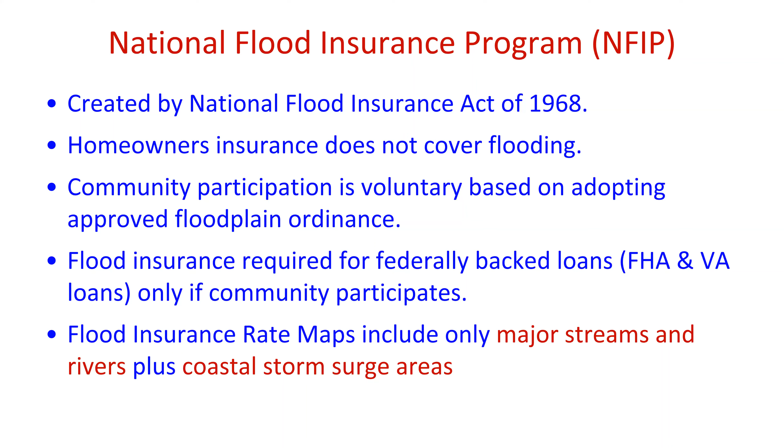Although the NFIP has disaster recovery policies, it depends upon local enforcement, which is one of the challenges it has. Insurance is voluntary unless federal funds or loans are involved. And what it really does, because it's a federal program, is make flooding an affordable risk. Before Harvey, it was over $17 billion in the red, primarily due to Katrina and Sandy, but it was never self-sustaining. I don't have figures on how bad it is now since Harvey came, but I imagine it's probably closer to about 30 billion in the red. But the point is, it's never been self-sustaining.

Other challenges is that it uses flood insurance rate maps, and because they're insurance rate maps, they're really not regulatory or planning maps. So they represent what the risk is today, even though future development may increase the flooding a foot or two. Only a community can adopt certain regulations for that, but the flood insurance rate map only shows what the flooding is now based on the best available studies. It identifies only what's called the 1% or 0.2% risk, known as the 100-year or 500-year floodplains, no matter how deep in the floodplain you are.

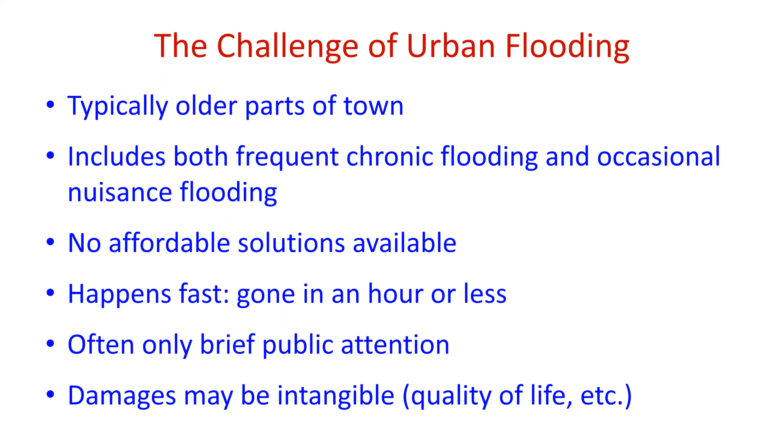Generally, this kind of flooding is not addressed by the National Flood Insurance Program. We've said that the flood risk is not mapped. It's all considered Zone X, no flooding. And it's considered really just a local problem. There's no established recovery process after flooding, like the NFIP has for when major flooding occurs along streams and rivers.

And it's a low grant priority. I've even had a floodplain manager call it not floodplain, so somehow it's not important, or it's not really flooding. I don't really understand that, but because it wasn't mapped by the federal government, apparently it's not very important.

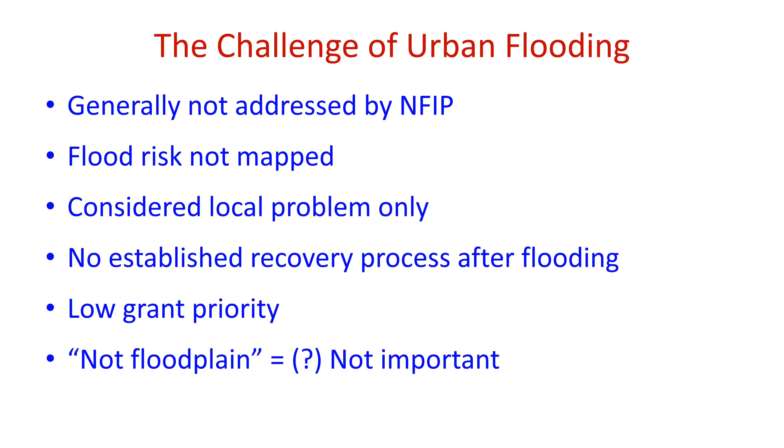So before we go further into looking at urban flooding, I want to go through 4 general considerations. The first is water law.

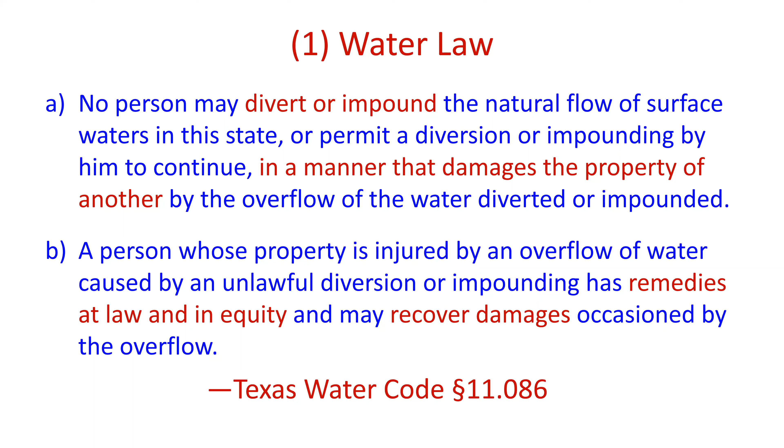In Texas, the water law is really handled by Texas Water Code 11.086, where no person may divert or impound the natural flow of waters in the state in a manner that damages the property of another. And a person whose property is injured by the overflow of water has remedies at law and in equity and may recover damages. So what does that mean?

It means lawsuits. And I have been involved tangentially in 2 or 3 different lawsuits over the years. The city was only directly sued twice, and it was really something that was more of a private issue.

But the folks doing the mediation really like to get the cities involved, since the cities have the money. But there's a lot of policy issues involved with some of these lawsuits.

A second consideration is what I'm calling the no adverse impact policy. This is from the Association of State Floodplain Managers as it relates to floodplain management. It says no adverse impact floodplain management takes place when the actions of one property owner are not allowed to adversely affect the rights of other property owners. It describes that in terms of increased flood peaks, increased flood stages, higher flood velocities, increased erosion and sedimentation, and other impacts the community considers important.

Many communities have adopted no adverse impact policies for new development, and ultimately, that policy should guide solutions to urban flooding. We can't solve urban flooding by putting in partial improvements and just moving flooding from an area upstream and pushing it downstream someplace. That's just not going to work.

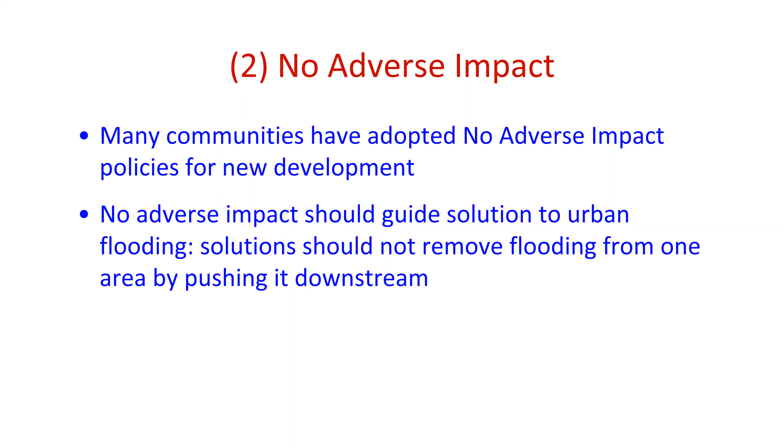Our third general consideration is hydrodynamic modeling. Urban flooding is really too complex for traditional modeling and calculations. Hydrodynamic modeling has become an essential tool for understanding urban flooding. It's able really to track overland flow as well as pipe capacity. But this fully dynamic flow modeling requires complex software.

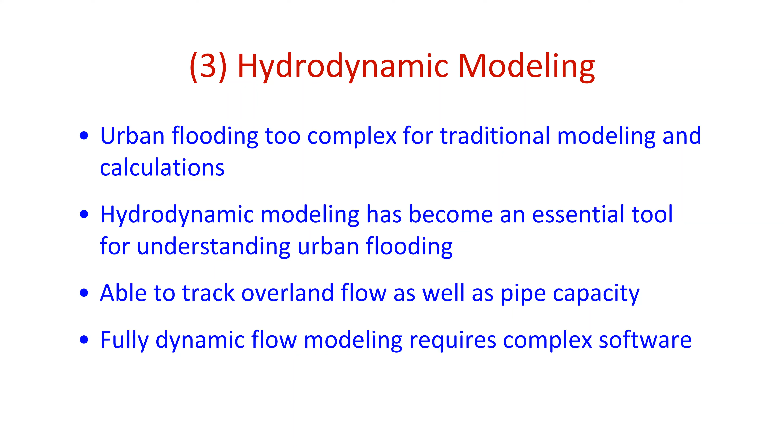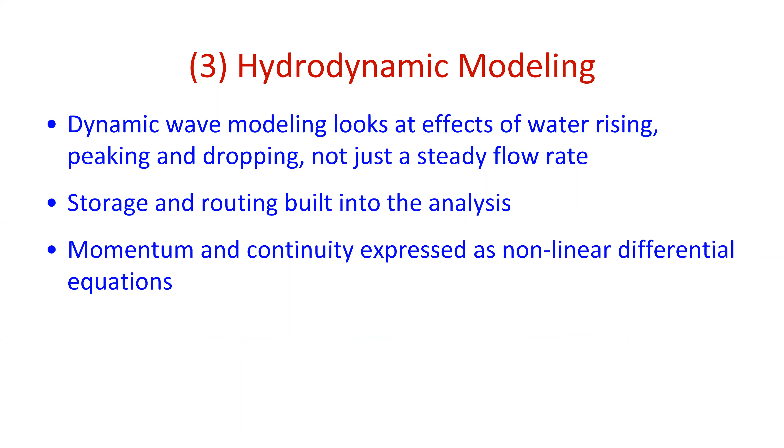The dynamic wave modeling looks at both the effects of water rising, peaking, and dropping, not just a steady flow rate, like many of us have with what I started out with, HEC-2, it's HEC-RAS now. Storage and routing are built into the analysis of this dynamic wave modeling, and the momentum and continuity are expressed as nonlinear differential equations.

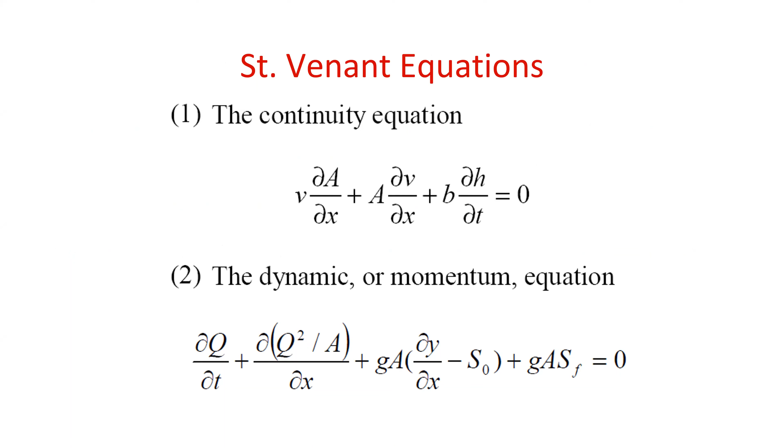I don't know about you, but I have never solved any one of these by hand. But fortunately for us, before these computer programs existed, we really couldn't do much. But we do have a lot of software available now. Two of the major products are now under the Innovyze umbrella.

InfoWorks was developed by Wallingford, and XP SWMM was developed by XP Software. They're now under the same umbrella. Mike Flood is produced by DHI.

The Corps has come out with HEC-RAS 2D, and it's more and more robust since the time I originally presented this. I've never used HEC-RAS 2D, but I've seen presentations where folks use it for some fairly detailed investigations. There's also other products out there that can be available.

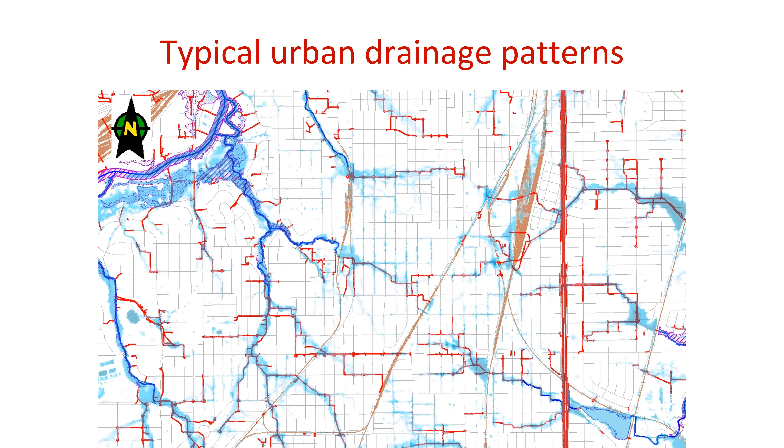But then you put on the storm sewer system and you realize that there's a whole lot of drainage that's really not accounted for. And you do some hydrodynamic modeling, and this is the kind of flooding that you can get in a neighborhood. You see it can be quite extensive and quite a bit broader than anything that's mapped as a FEMA floodplain.

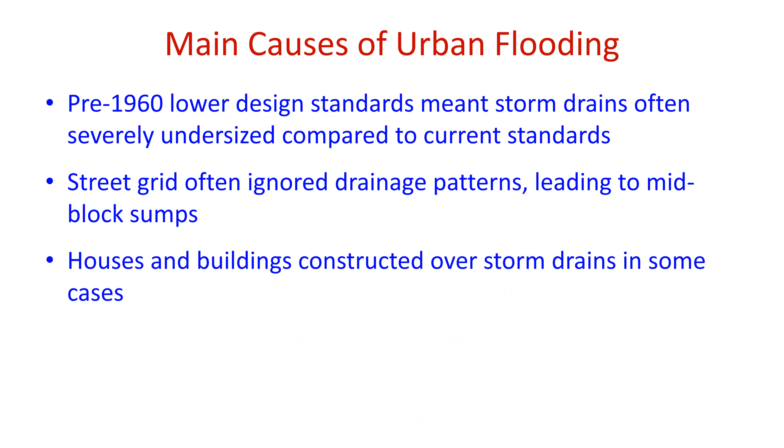So what are the main causes of urban flooding? Pre-1960 had lower design standards, meaning storm drains often were severely undersized compared to current standards. In fact, in some cities it's about 1990 when they adopted the 100-year design, if they have one that's that high. The street grid often ignored drainage patterns, leading to mid-block sumps, and houses and buildings were constructed over the storm drains in some cases.

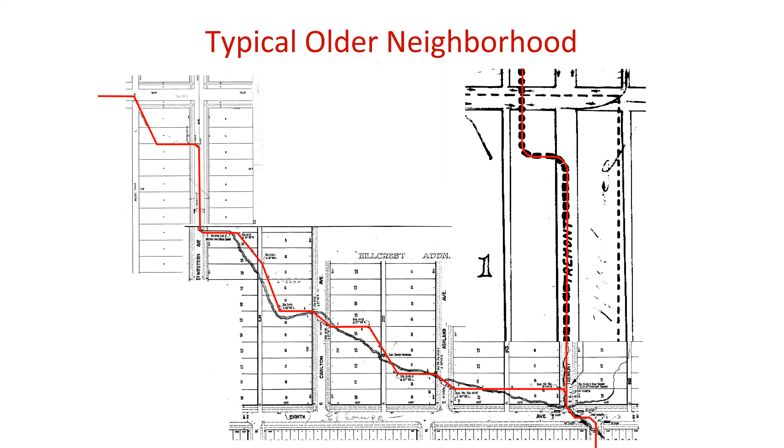For example, this is one older neighborhood in Fort Worth, called Arlington Heights, and we're going to come back to that. I pieced together the storm drain maps. You can see a stream going across, but I've highlighted the path of the storm drain. The plans weren't very easy to read, so there's the path of the storm drain. Now we lay over the neighborhood today, and you see it just kind of goes cattywampus right across the middle of the neighborhood.

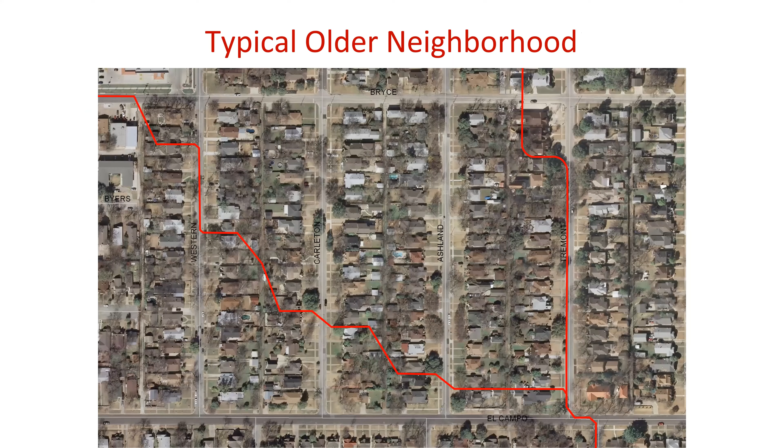And we start looking at the flooding, and you see all the extensive amounts that can be flooded. Now, it doesn't look like the flooding is too deep between the houses, but...

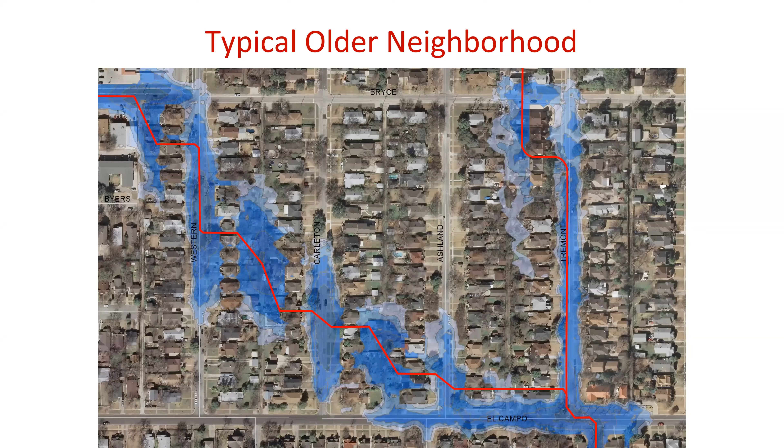Actually, on the next slide, we'll take a little video of this. Let me warn you now, I've got the audio on, and you might want to turn down your volume for just a moment before it gets too loud in this next video. That's right there in the street, and the water's every bit of 10 foot deep.

But as you see, all the water drains were popping up over there. Look, so, I mean this is not even slowing down, dude. It's still just powering out of there. Let's see, all that stuff on Camp Bowie will drain over here. Yeah.

Okay, I'm back. So, how do we solve this kind of flooding problem?

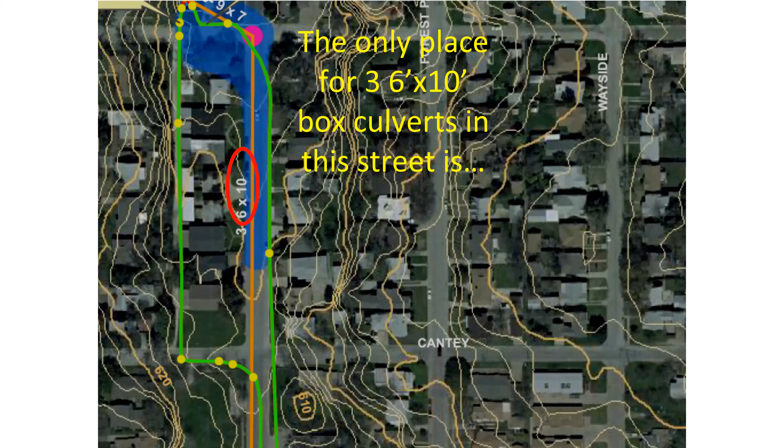Another area of town, we did a solution. It showed one little orange line that says 3 6x10 box culverts, but when you actually look at where the box culverts would have to be, the only room for them is actually where the houses are. And in that case, you may as well turn it back into a creek. We'll look at an example of that coming up.

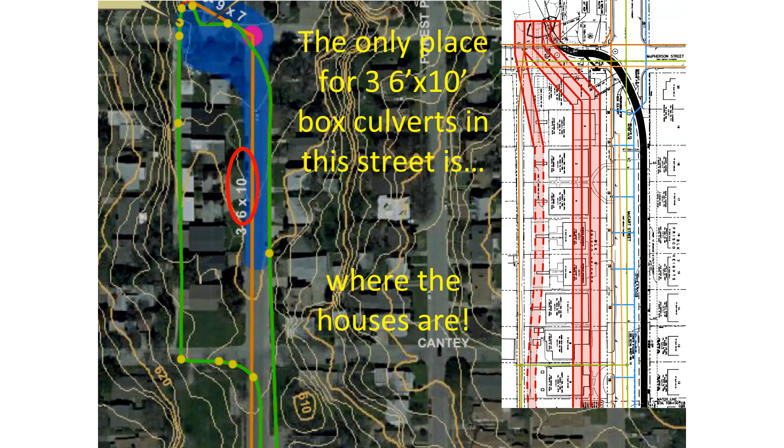What about following the street grid to reduce home buyouts? This is back in the Arlington Heights neighborhood. We laid out a little alignment to follow the street grid, and you see at the intersection there, the pipe would be 32 feet deep.

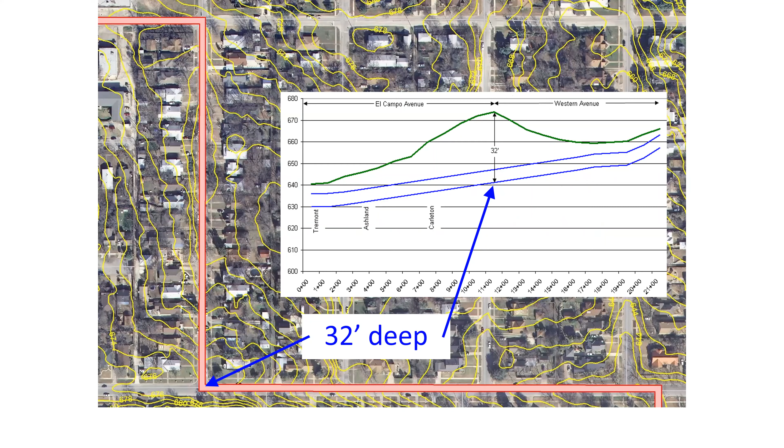Well, what about tunneling? Tunneling's a really, really neat idea. It preserves the neighborhood, you can go in deep underground. But in this particular case, this was $30 million, and that was about 10 years ago. Probably if you did a realistic, detailed pricing today, with really good information, you could still probably do this for maybe about $50 million. But again, very, very expensive to do.

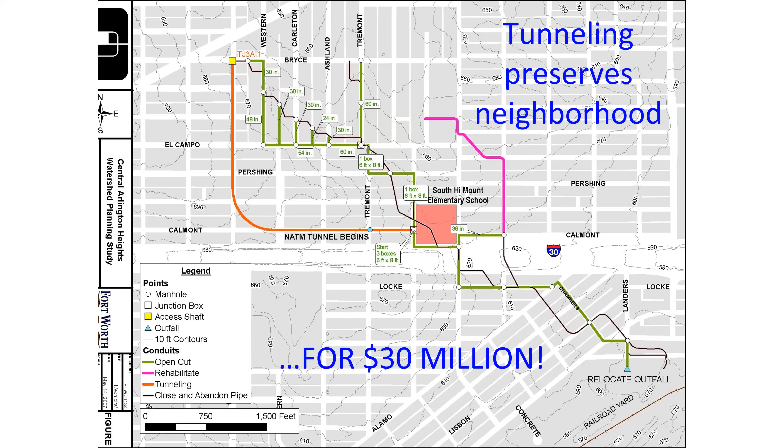We looked at one in the neighborhood of South Fort Worth, over by TCU, where we have extensive flooding.

This particular tunnel would be closer to $100 million in cost, but it would at least allow discharge directly to the river. We'll talk about why we would go directly to the river in a little bit.

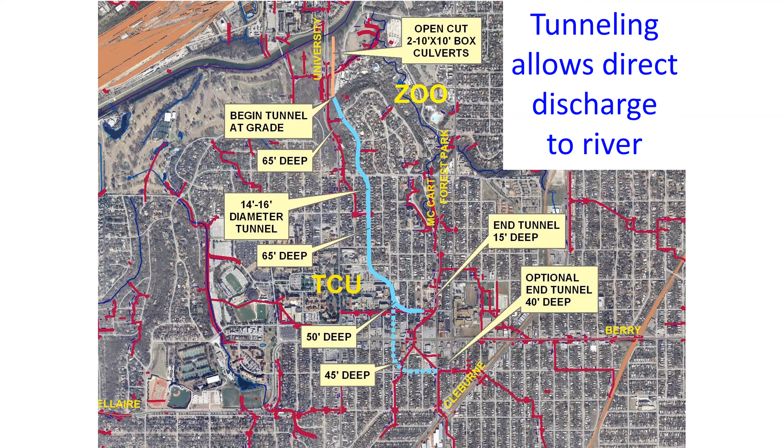In fact, that would be a real good time to do that now, and that's called the hydrologic considerations with conveyance. I'm going to talk a little bit about our college days - some of us remember the unit hydrograph method.

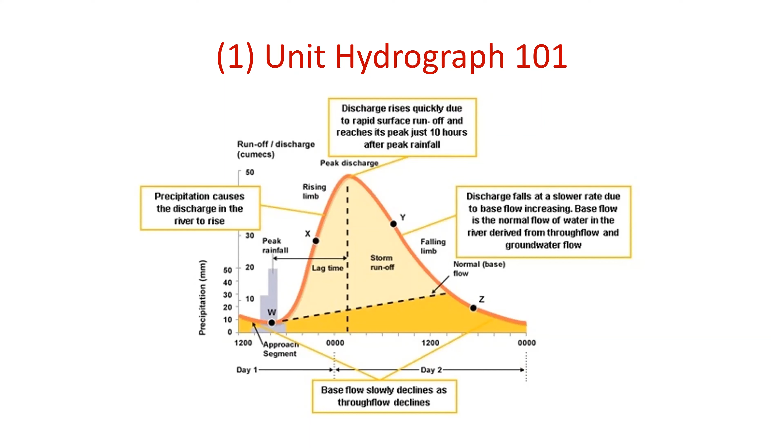The unit hydrograph shows how the flow rises after a storm. The gray represents the rainfall. The lag time is the time from the rainfall occurring to the flow causing the peak discharge, and then the water level goes back down.

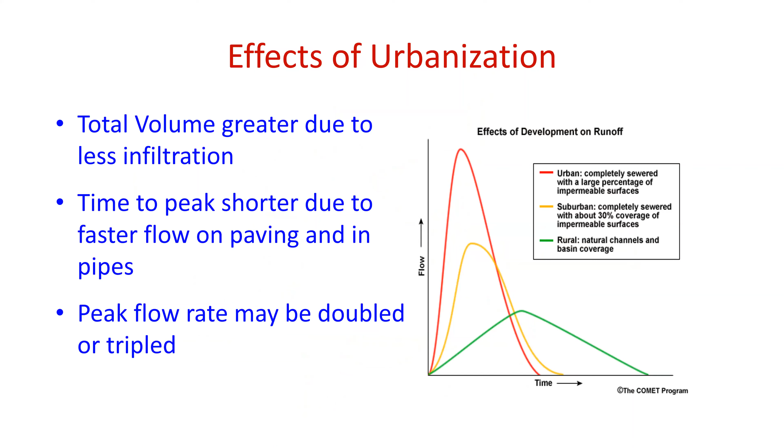Now, with urbanization, the total volume is greater due to less infiltration. The time to peak is shorter due to faster flow on paving and in pipes. And the peak flow rate may be doubled or tripled from what it was before development.

I'm going to give this example. This was prepared by HDR for one of our studies. They were actually looking at a floodplain along a creek, but they had three fairly large drainage systems all coming out, and the creek starts here in this 6B area. They looked at how you would estimate flow coming out of these storm drain areas.

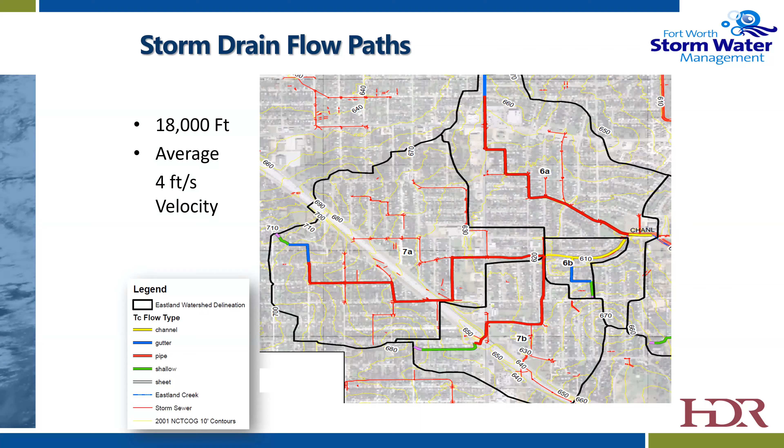The first thing they looked at was the storm drain flow path. These three areas together had about 18,000 feet of storm drain path, averaging about 6,000 feet. They said the average flow velocity would be 4 feet per second over the total distance, including the collection time and overland flow time.

If we had no storm drain, the flow path would total about 17,000 feet, and it averages only about 1.5 feet per second - significantly slower flow if there was no storm drain system.

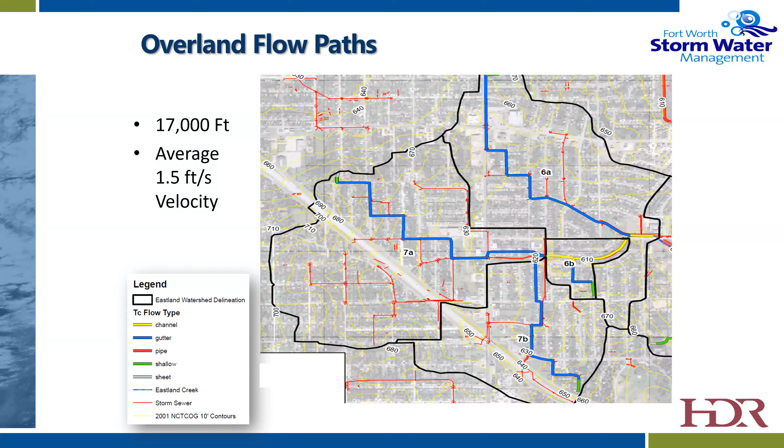So we're going to look particularly at the one in the middle here, the larger one, 342 acres. If it was only overland flow, the time of concentration is 68 minutes, and the peak flow would be 1,100 cubic feet per second. If all the water could fit in the storm drain, it would be a 28-minute time of concentration, and the peak flow would be 1,800 cubic feet per second - a fairly significant difference between the two.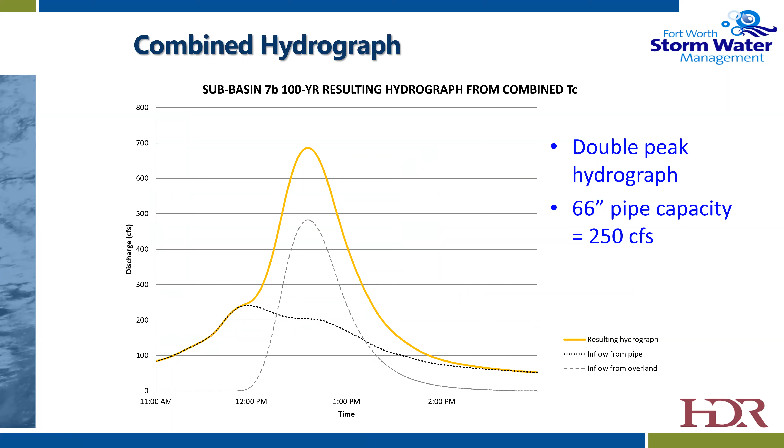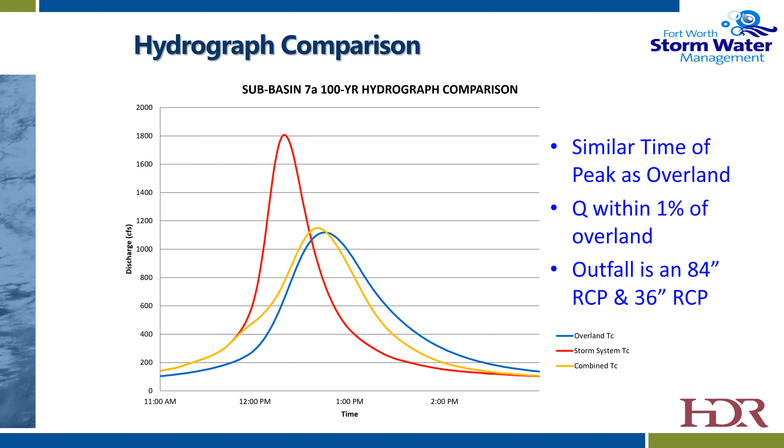So let's look at our three hydrographs together, and you find out that really the actual situation is not too different from a hydrograph than if it's all overland flow. The yellow and blue are fairly similar, and they're both significantly lower than if all the water were to go in the pipe. So the conclusion is that if we're actually going to put a pipe in that neighborhood, we could expect the peak flow to increase by over 60%, from 1,100 CFS to 1,800 CFS if we were to do that.

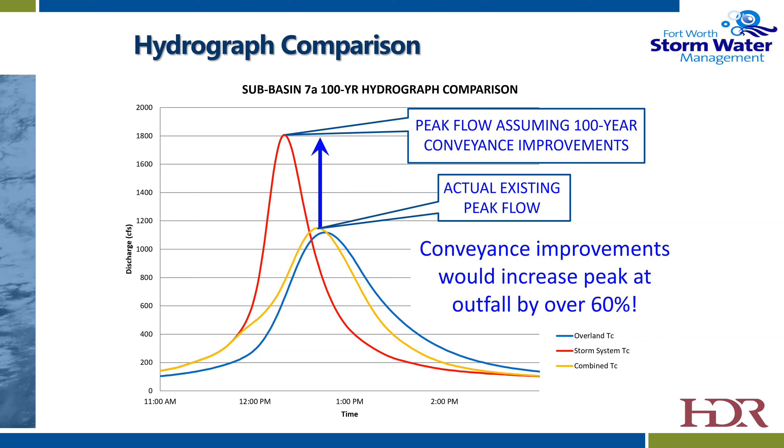Now, we're going to come back to look at the effects of this in a moment, but I wanted to talk about another hydrologic consideration, and that's valley storage. This is a measure of a stream's ability to store water as it moves downstream.

A good example of this is the Trinity River floodplain, across East Fort Worth and North Arlington. You see the floodplain gets really, really broad, but there is a lot of water that gets stored here. The more that we put in levees and reduce the amount of spread of the water, the less valley storage there is, and so the more water moves downstream.

Dallas has areas significantly subject to flooding, but if this valley storage were being removed, all of the Dallas levees would be more frequently overtopped.

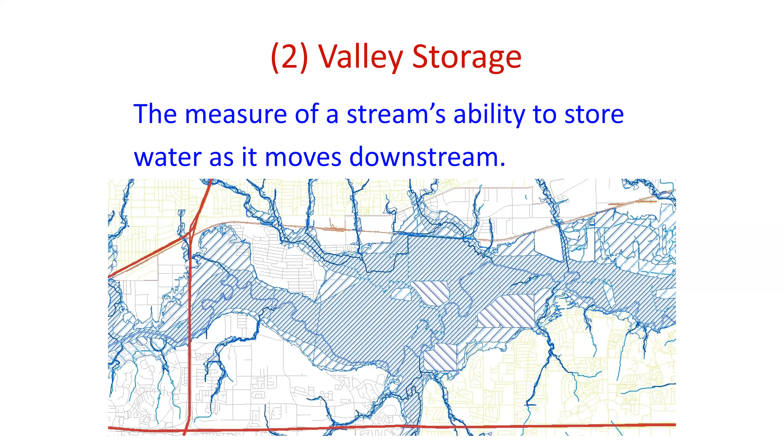So let's go back to the neighborhood we were looking at. We do have valley storage in neighborhoods when the storm drain is undersized. Somebody called that one time 'living room detention.' It's kind of tongue-in-cheek, but unfortunately you do have detention in the neighborhood or valley storage - unfortunately, it's in the living room of people. And so it's a catch-22.

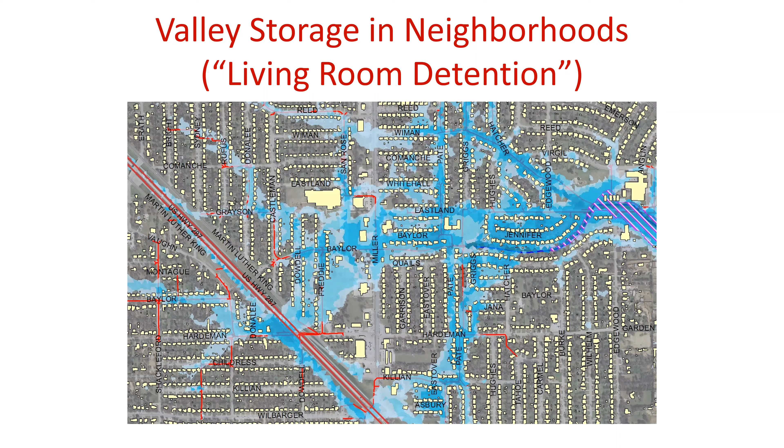So looking now at our situation, this is downstream of 2 of the areas we were looking at, and we're only looking at the north side of the channel. The channel itself is in dark blue. But the floodplain as it is now, with half the flow in the 5-year flow in the pipe and everything else coming over land, we didn't do a detailed hydrodynamic model, but this is a fairly decent approximation. The 100-year flow is shown in yellow.

So there's a few houses affected, but for the most part the water's contained in the street. If we were to put in a 100-year conveyance, just in this section alone, the number of houses affected would be tripled. We could probably expect that, or maybe more, on the south side of the channel.

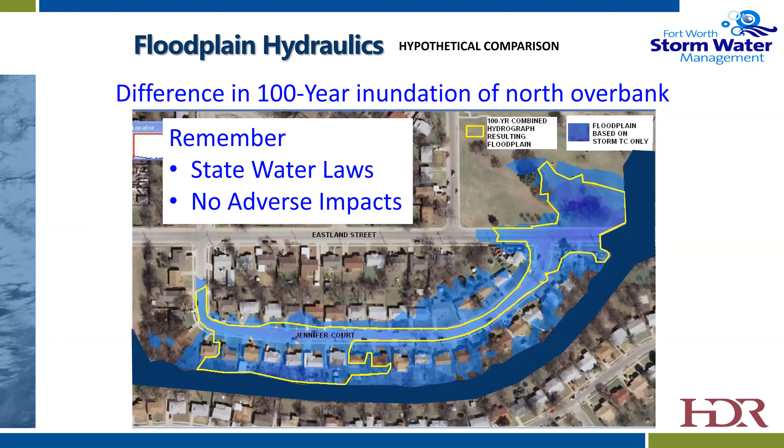So what does this tell us? It tells us we've got to remember the state water laws and the no adverse impacts policy, and it makes it very difficult to put in upstream conveyance where we'd cause increased downstream flooding. So in conclusion, our upland flooding is caused by undersized storm drains. Upland flooding caused by undersized storm drains will reduce the flooding downstream. So living room detention, which is bad for people upstream, is actually valley storage, which is good for people downstream. And so the larger pipes we put in, we're likely just to move the flooding downstream.

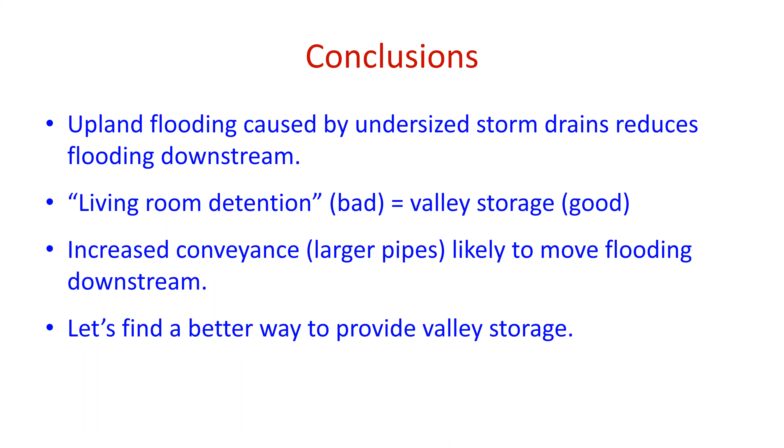But we need to find a better way to provide valley storage rather than in people's living rooms. And of course, that brings about the magic word called detention. So going back to the unit hydrograph, the whole point of detention is to try and control the peak flow, limit it to what it was before urbanization.

There'll still be a greater volume. There'll still be a greater length of time at that peak. Some folks have talked about increased erosion issues and things like that. Those are things you have to deal with on an individual basis. But ultimately, it tries to bring down that peak to what it was before urbanization.

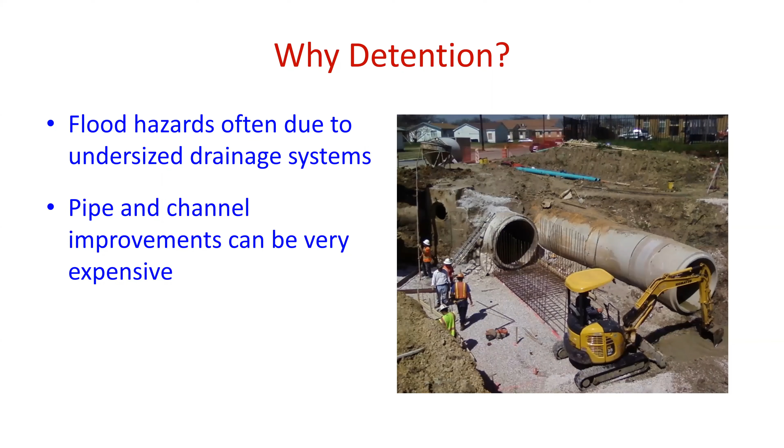Now, why would we do detention? Well, flood hazards are often due to undersized drainage systems, and pipe and channel improvements can be very, very expensive. The conveyance improvements can push the flooding downstream. We've just looked at that. Here's some examples of the kinds of impacts you might have. And there's the legal implications we've just talked about for causing downstream impacts.

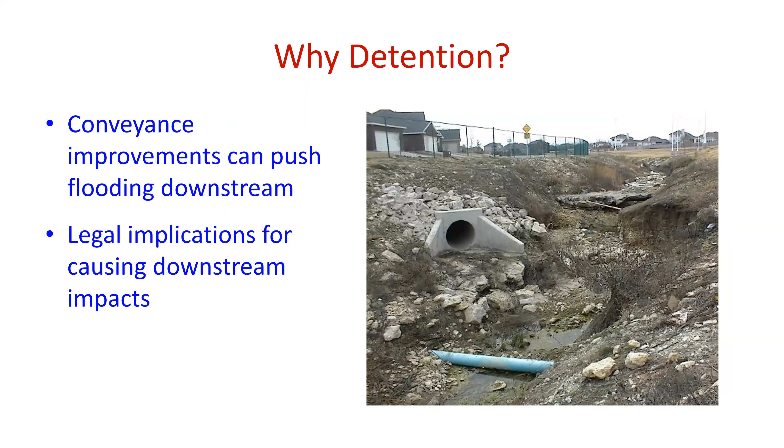So why would we do detention? Well, detention decreases flooding impacts continuously. Everywhere you put in detention, everywhere downstream from that point all the way downstream, the flooding impacts are decreased. And detention is much cheaper to build, except for land cost. Now, every once in a while there's a way to get around land cost, but that generally means your detention is doing something it wasn't really intended to do.

To my friends at Texas Tech, thank you for the good example for detention.

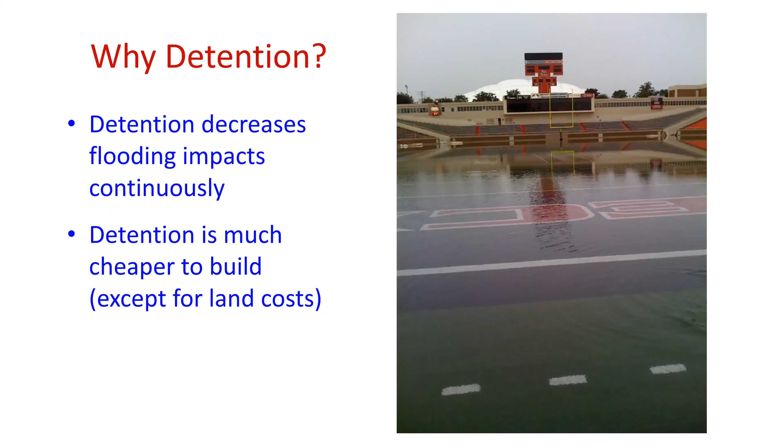Now, in 2002, shortly after I went to work for the city, I didn't know near as much as I know now about detention, about valley storage. And so we had this same Arlington Heights neighborhood, and we had this little vacant tract of land up at one corner. And I had somebody do a study and say, well, can we put detention there, and how's that going to help us? So his study showed that 108 acre feet of detention were required.

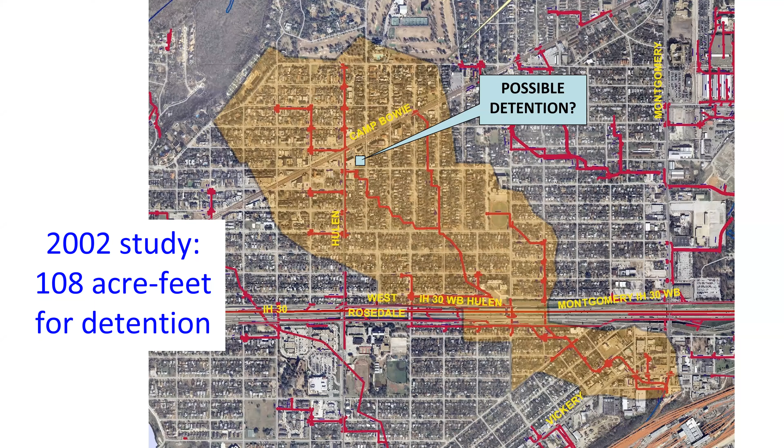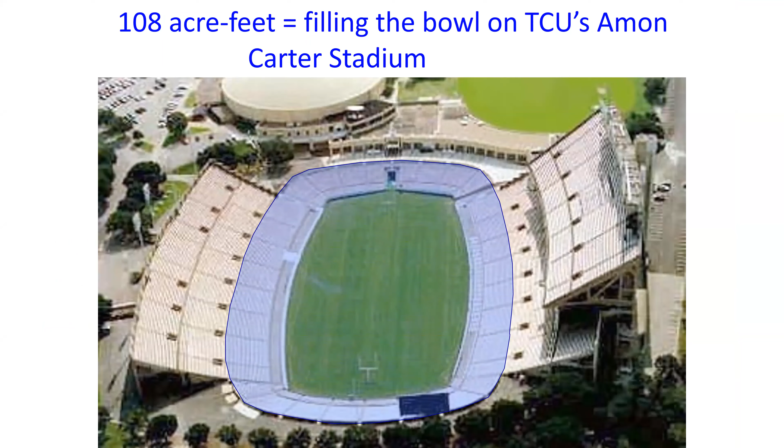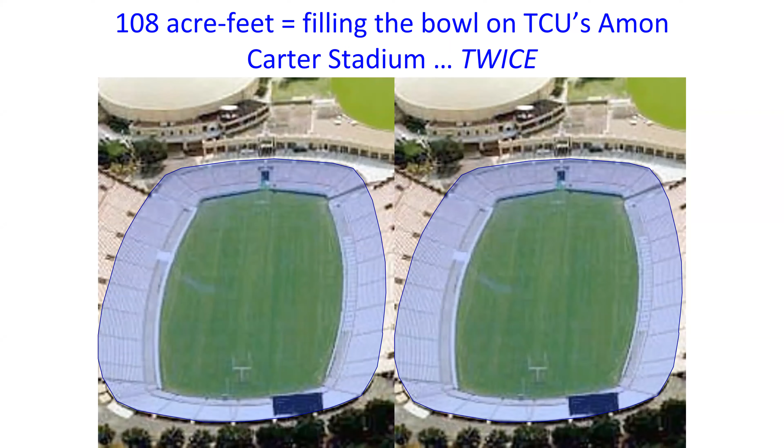108 acre feet will fill up the bowl of TCU's Amon Carter Stadium. Now, this is the old configuration of the stadium, but the bowl is still the same. And it would fill it up, unfortunately, not once, but twice. That's a lot of water. Since we're using the example of flooding a football field, I think this was a good example.

Now, I had these slides done before the Texas Tech Jones Stadium flooding pictures came out, but nevertheless, it shows us how much water can be involved. Now, that 108 acre feet translates to 35 million gallons. And when you look at detention in a neighborhood like that, you really find that you can affect up to 76 homes, which is a significant amount of land, a significant amount of buyout to provide the level of detention that's needed.

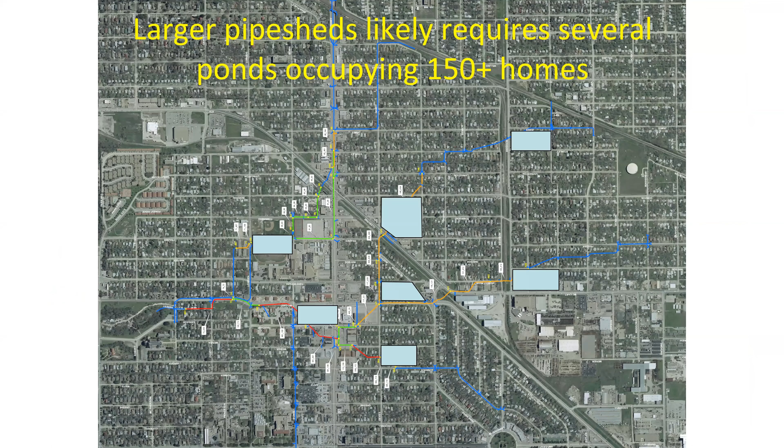In larger pipe sheds, you're likely to require several ponds, and this is the one near TCU where you'd be affecting maybe over 150 homes that would need to be bought out. We did look at what if you did deep detention, if you could get the water to one location and do deep detention and then pump out the water after the storm. It looked like a pretty neat idea.

If you remember how storms come in Texas, the flooding we have up here in Fort Worth isn't like coastal flooding, but most of the rest of the state has the same kind of flooding we do. The thunderstorms that come in the afternoon can stop somewhere and just generate a huge downpour, a local centered storm.

So when you have your pumps, you've got to pump it out. Last night's storm may have filled up half the deep storage, but the next storm that comes through this afternoon could be the 100-year storm that sits on this neighborhood. So you need to have your detention empty. You'd have to have a significant level of pumping in order to keep that thing emptied within 24 hours so you're ready for the next storm. Really neat idea, really, really expensive.

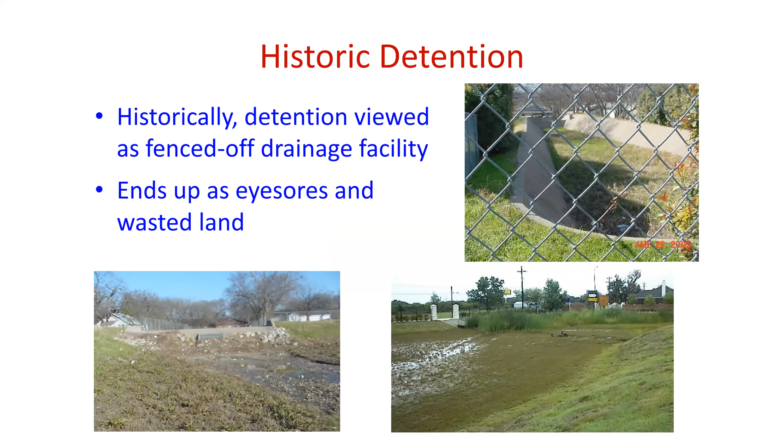Historically, detention was viewed as fenced-off drainage facilities. These are some of the detention ponds that I dealt with when I worked for the city. They end up as eyesores, wasted land, not very healthy.

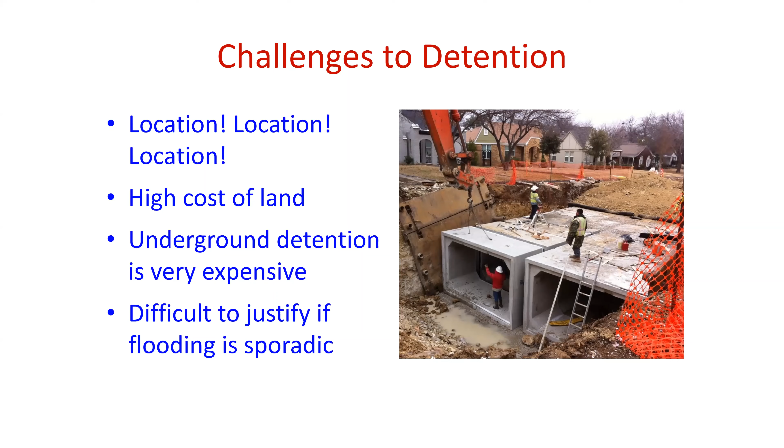Another thing, when you start doing buyouts of properties that are flooded, if you leave empty lots behind, planners call this a loss of neighborhood integrity. What happens is the lots become an eyesore. It discourages investment, encourages crime, reduces property values, and you really lose your neighborhood integrity.

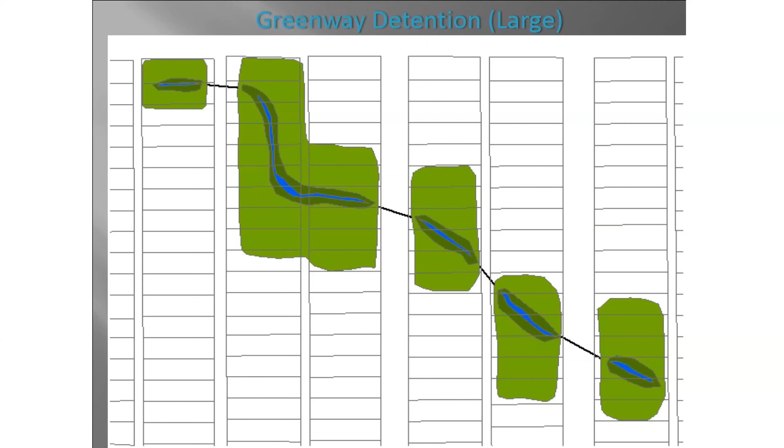So maybe the more effective solution, instead of buying all 76 lots individually, is to buy a significant chunk of lots together and turn it into a greenway or parkland. Perhaps you open up the stream, but you do things to make it a neighborhood amenity and not just vacant lots.

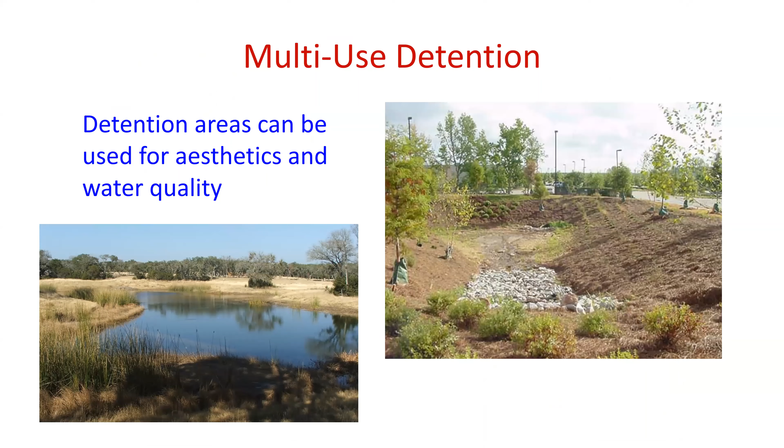There are ways you can put in multi-use detention, so you can use them for aesthetics, landscaping, water quality. They can actually become neighborhood resources. Here's a couple of examples of neighborhood detention areas: the one on the left is Wells Branch in North Austin, and the one on the right is LeBlanc Park in South Fort Worth.

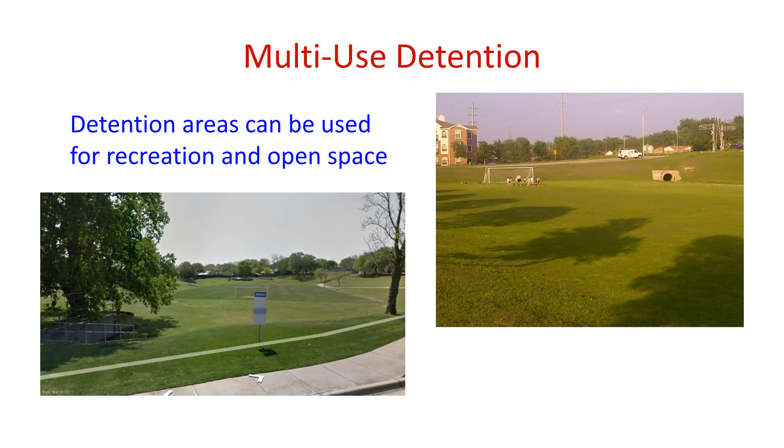When I was at the city, we developed a solution in a neighborhood that had significant flooding. We talked to the school district. They had some vacant land by Eastern Hills Elementary School, which is in the background, and Eastern Hills High School, just to the left of the picture. We created a large detention basin. They still own the land, and the city has a maintenance agreement with them.

For most of the time, the water is contained either in the channel or in some catchment basins upstream of this, but in major storms, the soccer field now becomes a major detention area to significantly reduce flooding downstream.

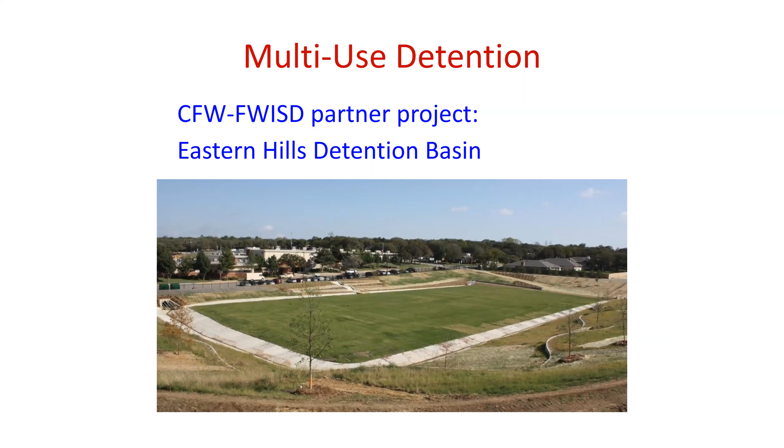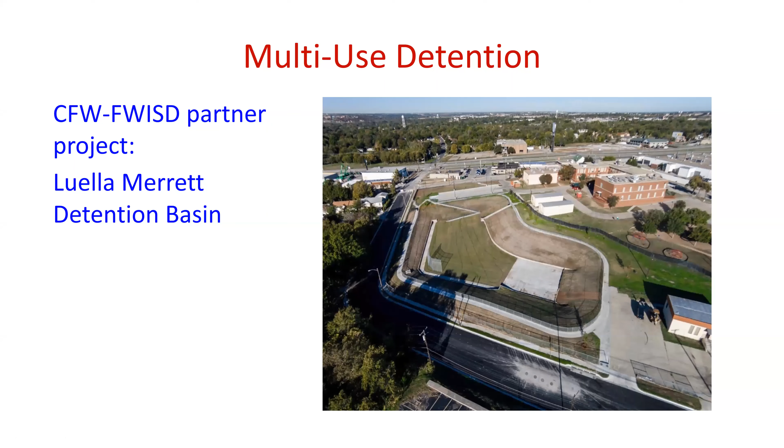This was actually so successful that we applied it at a smaller flooding situation at one of the elementary school sites across town, Luella Merrett. We took their hillside and dug out a basin, put in a berm on the street side. They've now turned it into a regulation-size soccer field. They also have it as a softball and kickball field, and a little paved area that the principal asked for, for basketball. This was before the basketball nets went in, but it was very well received by the school.

And then this is a detention basin, also in the Arlington Heights area, a little commercial area next to our under-street detention. We bought it out, and it's now a little neighborhood park.

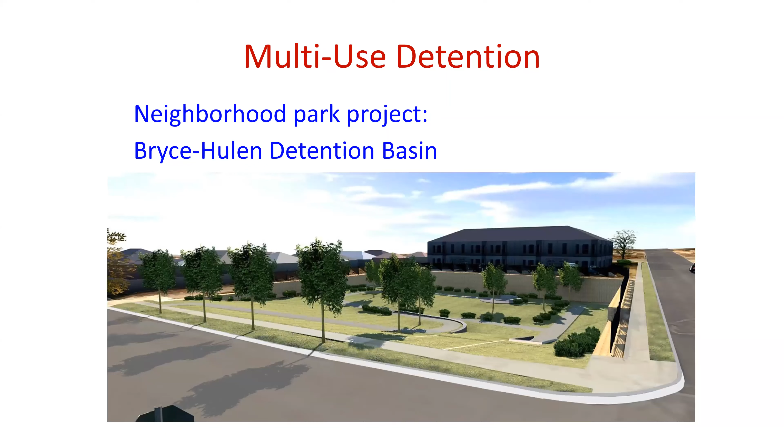I wasn't tall enough for this artistic perspective - it was taken about 20 feet up in the air, but it does exist today. This was a little better picture than what I could get from ground level.

In some areas, they're actually daylighting streams. The picture on the left was taken probably about 100 years ago when they were enclosing the stream in a big culvert. About 20 years ago they took all of that out, and they've turned it now into an amenity for the area. It helps because the open area now has more capacity than the pipe did. It also helps reduce some of the flooding, plus it becomes an amenity.

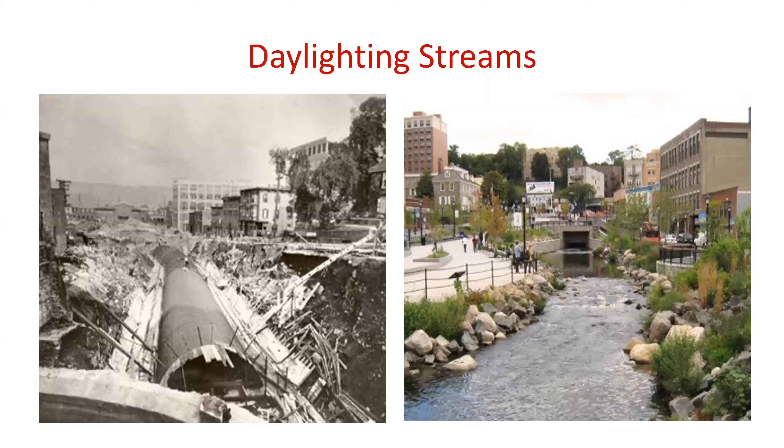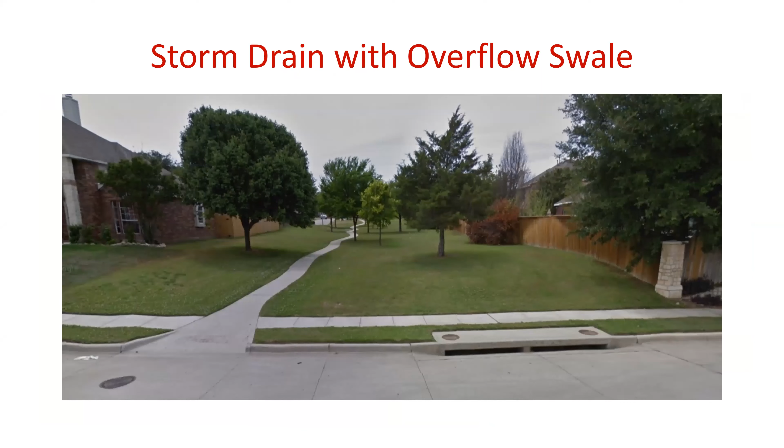In Fort Worth, we've actually had places where the storm drain might not be fully sized for a 100-year event, but we'll have an opportunity to have an overflow swale in a little parkland above it. So we have parkland, but it can be used as an overflow swale when the pipe is overtaxed.

Our conclusions are that any sustainable urban flooding reduction program must manage flooding in place. The detention and storage must account for timing as well as hydrograph peaks, but detention is really only acceptable as a widespread strategy if it is also a useful space for the public.

In areas that are redeveloping, everybody wants to build on vacant land, so you've got to make it very useful as parkland and not just detention before you get neighborhood buy-in.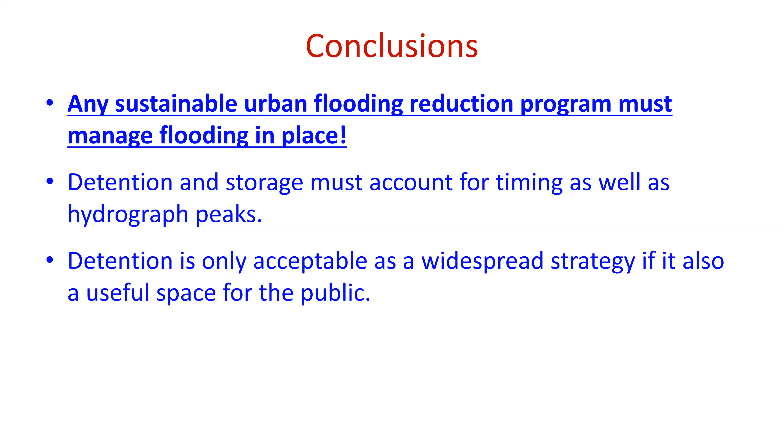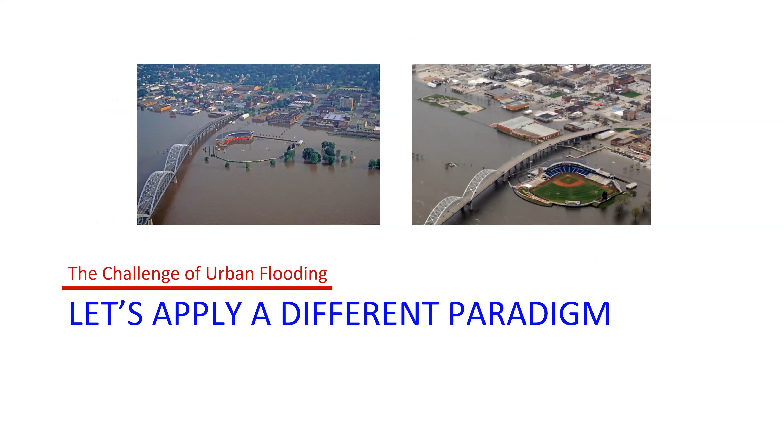Now I want to conclude today with a slightly different paradigm that helps us find some solutions to urban flooding. I'm going to credit this idea to Brenda Gasparich - she developed this for us based on Michael Lewis's book Moneyball, dealing with the 2002 Oakland A's baseball team.

They had about a third of the payroll that the New York Yankees did. Based on their fan support and revenue, that's all they could really afford for payroll. So how do you compete with another team that can have 3 times your payroll potential? Well, if you're familiar with either the book or the movie, you have to challenge the conventional wisdom, and ultimately the numbers do not lie.

So let's look at what the book was talking about. Baseball teams have traditionally relied upon scouts to assess players based on observations, biases, and prejudices. There were a lot of bad investments - hello, A-Rod. This was challenged by sabermetrics, a term developed by Bill James, to look at other statistical measures. For example, the on-base percentage statistic may be a lot more important than true batting average, and in some cases you can see the true value in players that will be bargains.

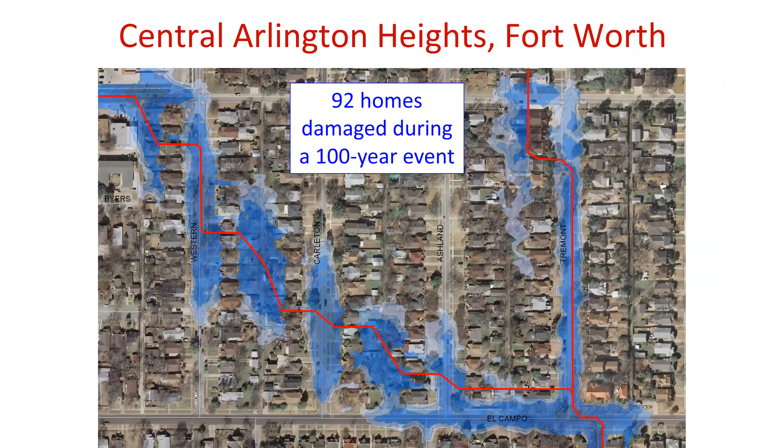We've already looked at how conventional wisdom says we've got to provide 100-year capacity. We look at a 24-hour rainfall event. We minimize disruption to the neighborhood. All of these things, our conventional wisdom says, just aren't going to be affordable.

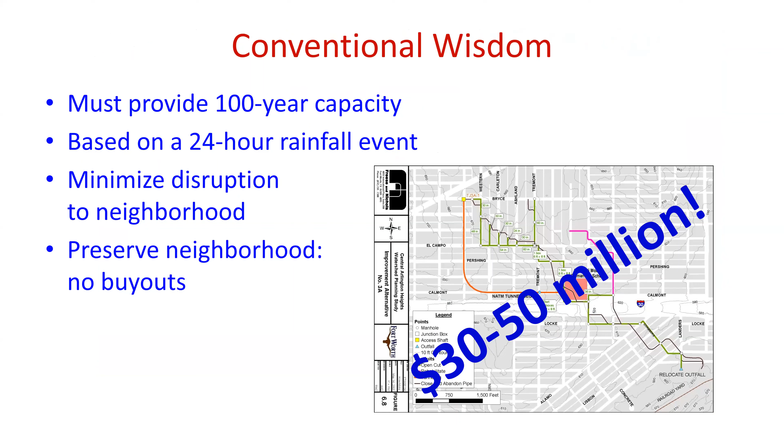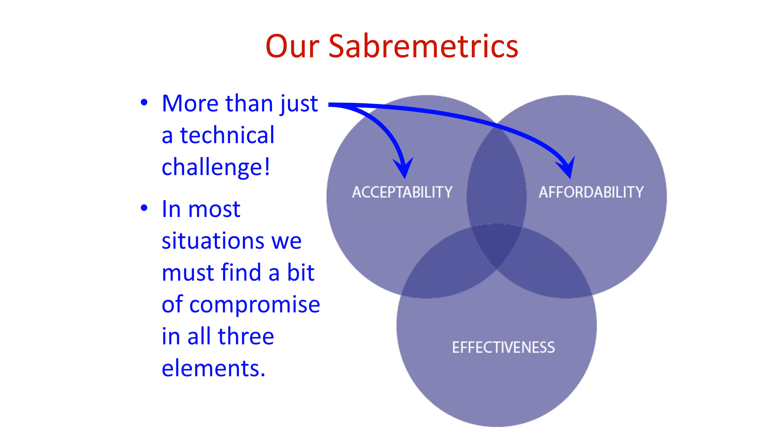So what we've got to do is get beyond simply more effective solutions, and look at other issues like acceptability and affordability. It's more than just a technical challenge for us to find these solutions, and in most situations we must find a bit of compromise in all three elements.

So let's look at some examples, some potential solutions. First of all, the do-nothing solution is one that studies have done for decades because it's the most affordable solution. If you can't do anything else, at least doing nothing is affordable.

Traditional solutions typically are very effective, but they're neither affordable, and in many cases not acceptable to the neighborhood. Tunneling is very acceptable to the neighborhood and can be very effective, but absolutely not affordable.

Everybody talks about green infrastructure. Green infrastructure is really cool. Everybody wanted to do that in Arlington Heights. It's very acceptable, very affordable, but in these older neighborhoods not really effective. We figured out that we need at least 100 rain barrels on every lot upstream throughout the whole watershed to provide effective reduction in flow, and you just can't fill up 100 rain barrels with roof runoff.

Buyouts may be the most affordable and effective option, but if you have a historic neighborhood, not very acceptable - certainly not in this Arlington Heights neighborhood. In fact, they said, let's buy out the whole upstream neighborhood instead. That was the one that was acceptable to them. But obviously that's not realistic either. So what then do we find that fits in the middle?

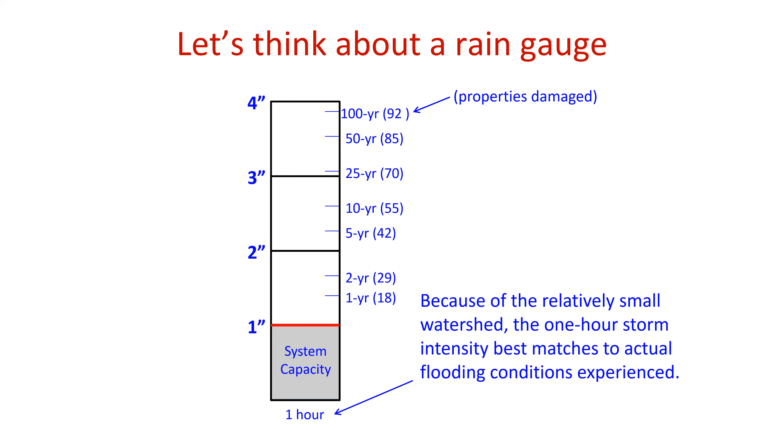I'll give credit to Burton Johnson for this idea: thinking about a rain gauge. Most of these urban drainage systems are small enough that really a 1-hour storm is all you have to look at. You look at our rain gauge, you can see the different levels of flow in a 1-hour storm, up to 3.8 inches of rain in a 1-hour storm in the 100-year event, showing the number of properties damaged. Our system now only holds an inch an hour - originally held only an inch an hour.

We start looking at damages and we see that, with 92 homes damaged, a 100-year storm causes $5 million of damage. Now this was several years ago, the economics are...

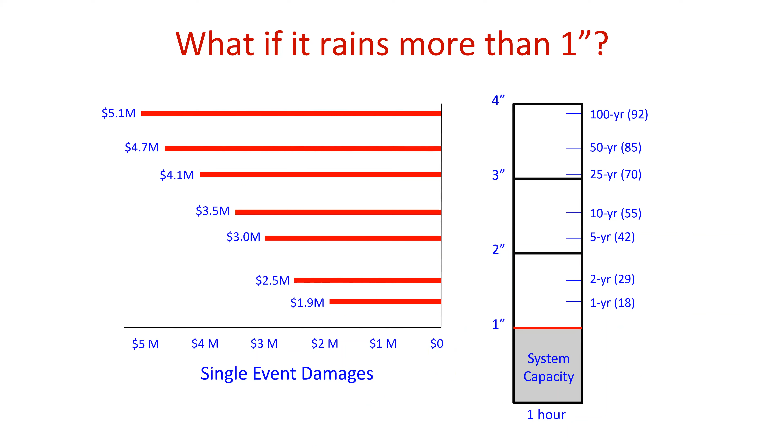Based on idealistic curves, but what if we look at the annual probability - because there's only a 1% chance, the expected annual damages of a 100-year storm are really only $50,000 per year.

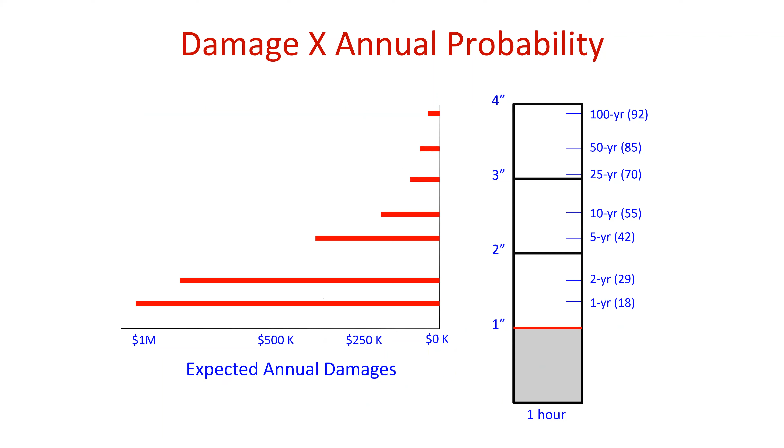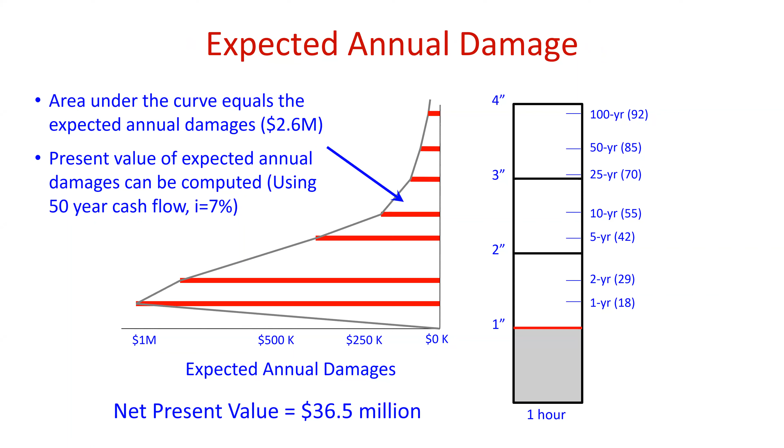You do a little bit of funky economics - you remember some of this from industrial engineering class. The area under the curve equals the expected annual damages, which was $2.6 million, using the net present value and an interest rate of 7% and a 50-year cash flow. The net present value of flooding ended up being $36.5 million for this storm level.

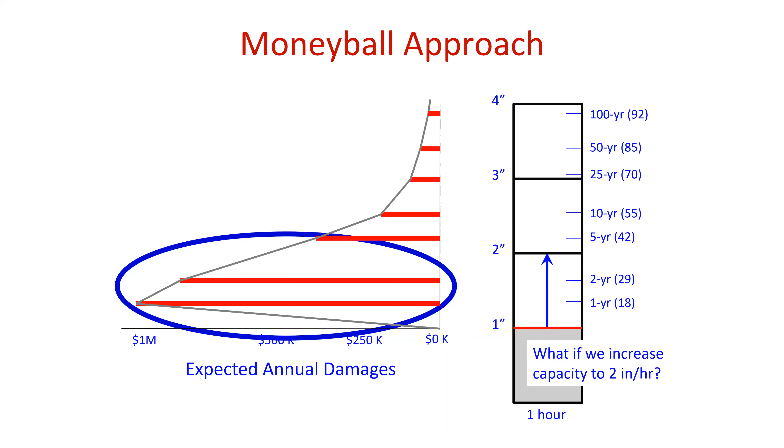But if you really start looking at the Moneyball approach, you say, where's all the damage occurring? The damages are really occurring in the 2-inch storm or less. So all we have to do is, if we can raise the capacity of our system - not up to 100-year, not even up to 5-year, but just from 1 inch an hour up to 2 inches an hour - we can actually reduce all the area of pink, which is the reduced damage, and the white is the damage remaining. That net present value of remaining damage is $7.5 million, which means if we can just get from 1 to 2 inches an hour, we've got $29 million of benefit.

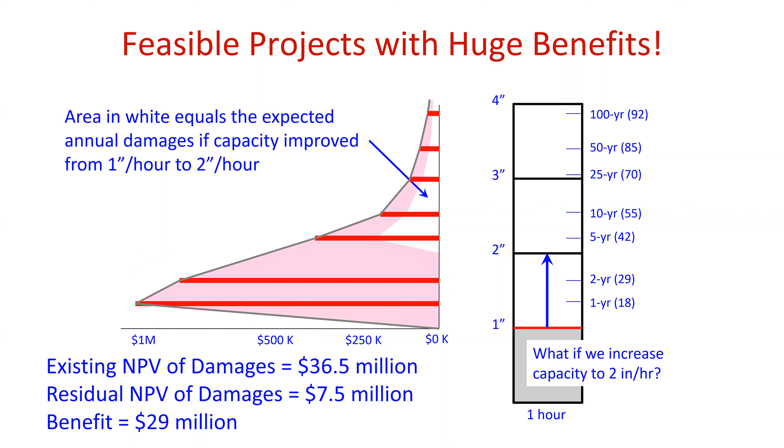So, in summary, basically you want to challenge the conventional wisdom. You've got to rethink your level of service. We're managing flood risk and property damage - we're not looking at public safety. We've got to rethink our hydrology to what's practical.

The technology can assist us in developing this information in a larger area. We're using hydrodynamic modeling instead of sabermetrics. And we've got to develop a smart metric that's based not on some idealized situation, but on real economics. And so you can compete with the Yankees by optimizing performance and finding value.

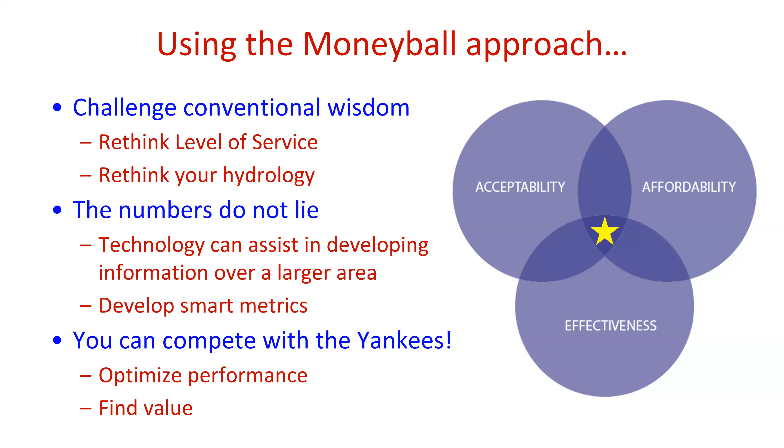We've got one question, Stephen. How reliable is the 100-year event system?

How reliable? Well, there's always, first of all, there's no ever 100-year storm that really flows. You're always dealing with the fact that when the 100-year storm actually comes, there's going to be inlets that get plugged because of debris. There's going to be trees that come down and block creeks and things like that. So the 100-year storm, you never really get anything that's exactly a 100-year storm. It might be 100 years in one neighborhood, and the next neighborhood over is 25 years, and the next neighborhood over didn't get a drop of rain at all. So it's the whole concept of a 100-year storm: you got to have enough capacity so that you can handle at least most events that come up, even if it's only a theoretical storm, even if it's only theoretical capacity, nevertheless you're going to ultimately at least have more capacity available to deal with the storms that you do get.